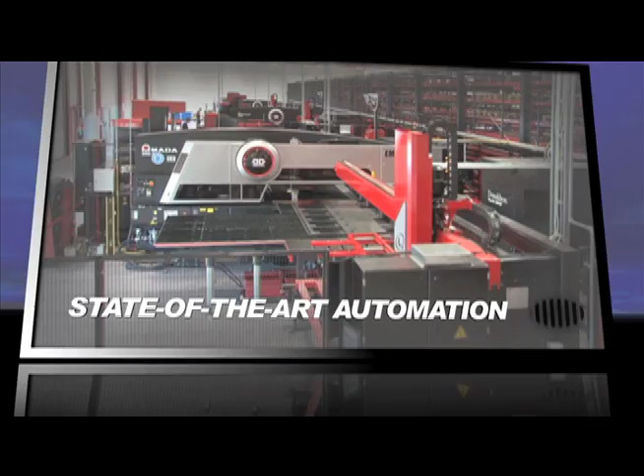Automation is a key word for us. State-of-the-art automation. Flexible. Streamline processes.

Haaland is always overcoming challenges and creating a clearer vision of the future. The challenge of automation.

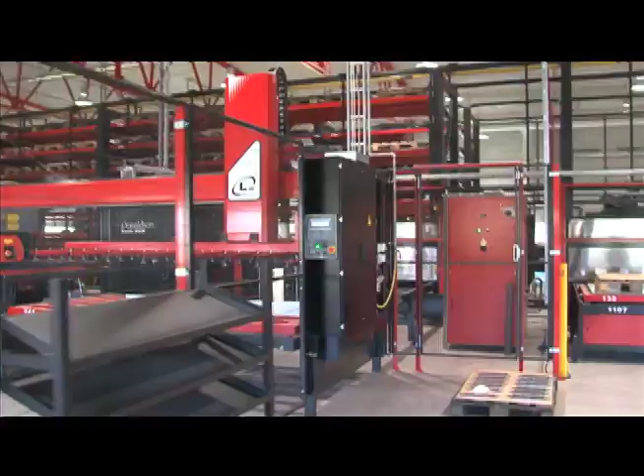Norway - this country is famous for its fjords and wild and beautiful nature. Haaland is located about 50 kilometers south of Stavanger. Over the past couple of years, Haaland has faced tremendous challenges to introduce and incorporate state-of-the-art automation systems into their facilities. The people of Haaland are proud to share their story and success.

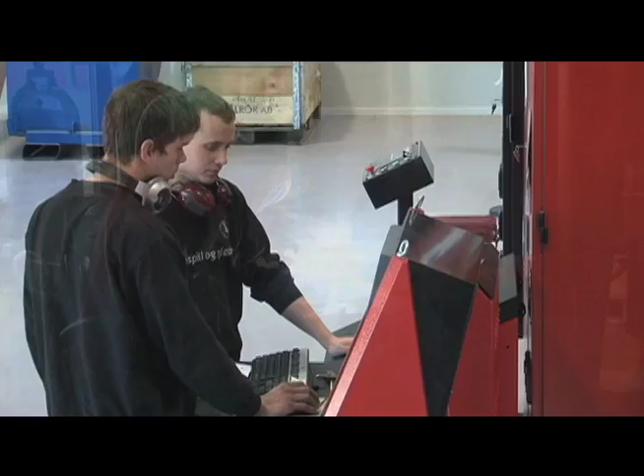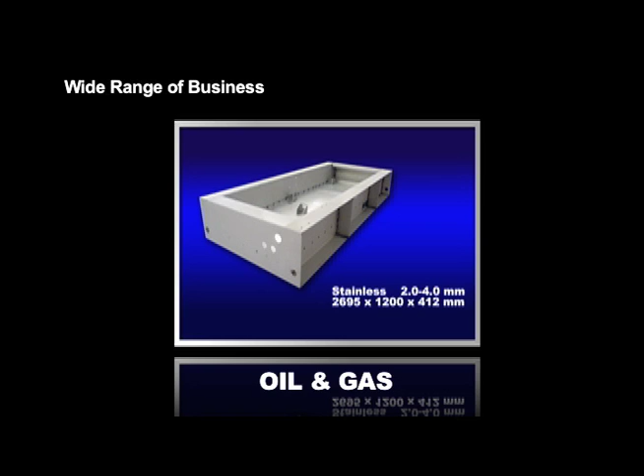My name is Ragnar Sandva. I'm the managing director of Haaland. Haaland started its sheet metal business back in 1982, and we are currently about 100 employees. We are a subcontractor company covering a wide range of businesses from oil and gas, electronics industry, agriculture, and also some for the maritime industry.

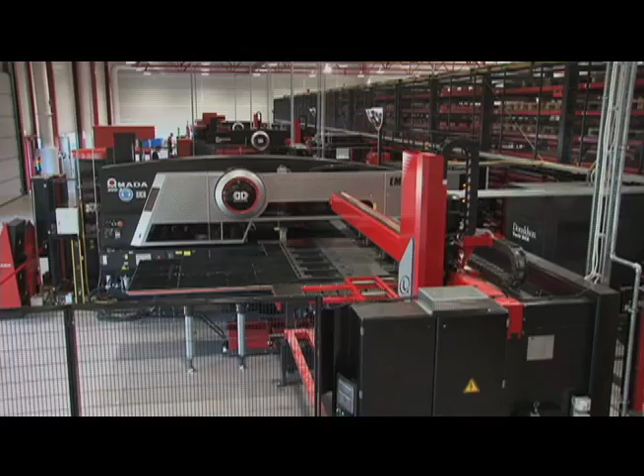Mr. Ragnar Sandva explains the reason why Haaland introduced state-of-the-art automation systems into their facilities. We did a lot of forklift driving, transporting raw material into the machines and finished goods out of the machines. We used to spend maybe many thousand hours driving forklifts all around the factory, and there was a lot of manual tool setup.

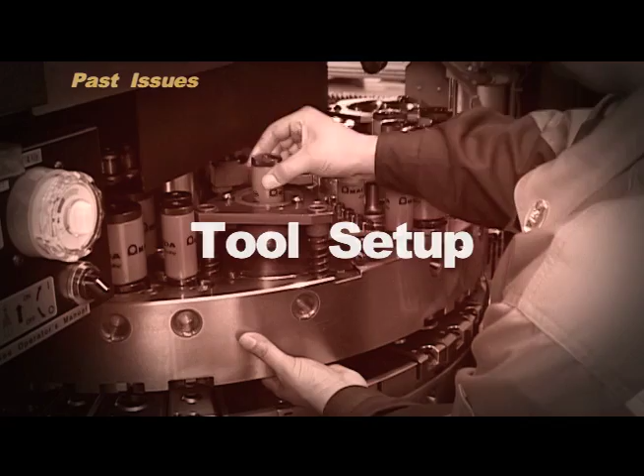When we decided to build a new factory, Amada was the company that came up with the best solutions to our questions. We saw on the entire manufacturing process, from design through programming, production and finished goods.

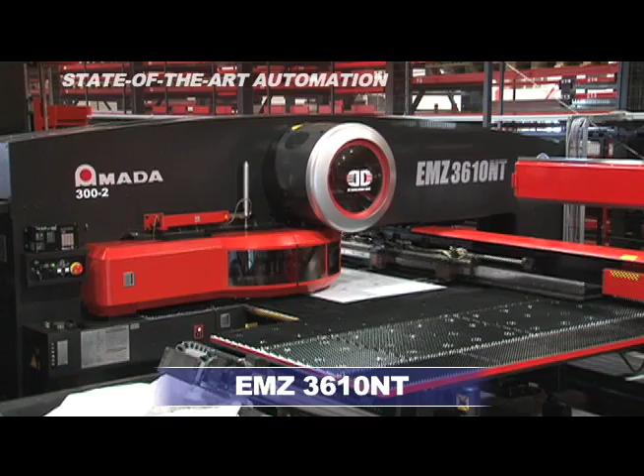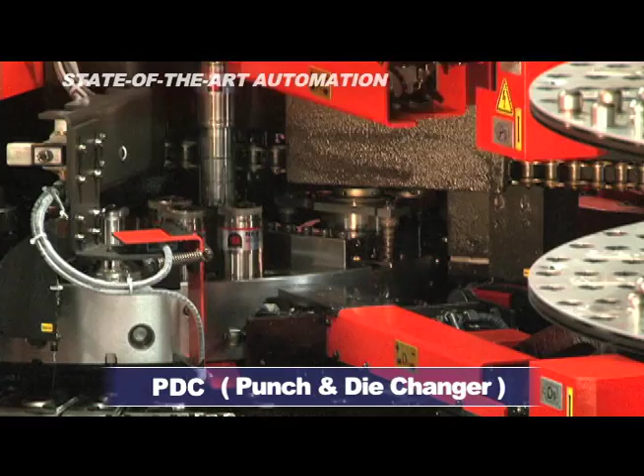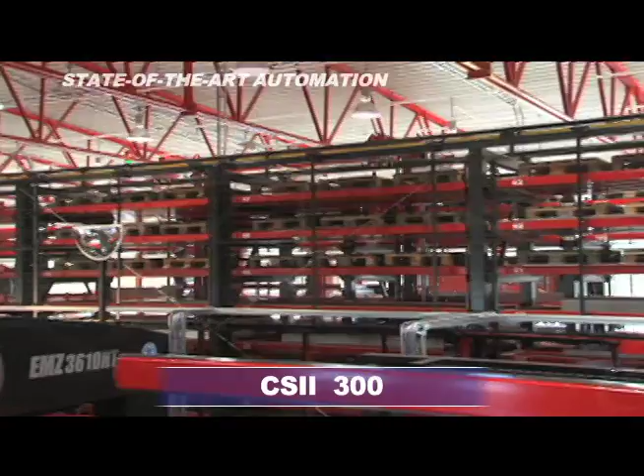Let us first take a closer look at their new automation system in the blanking process. There are 2 EMZ 3610NT punching machines and 1 EML 3610NT punching and laser combination machine combined with the PDC, or automatic punch and die changers, as well as an automatic sheet loader and parts unloader. Those 3 machines are connected for a total of 299 shelves in the CSII 300 automatic storage system.

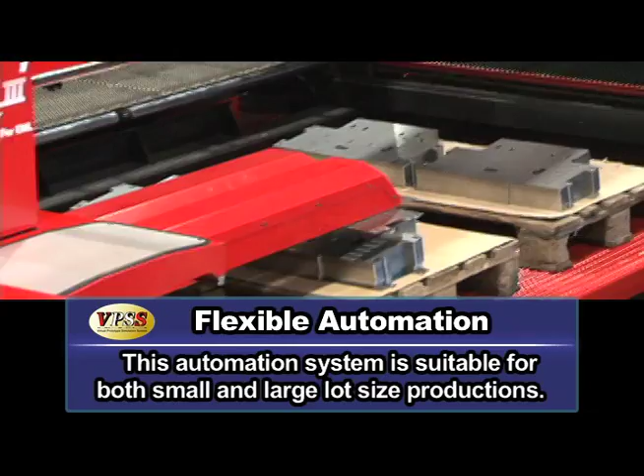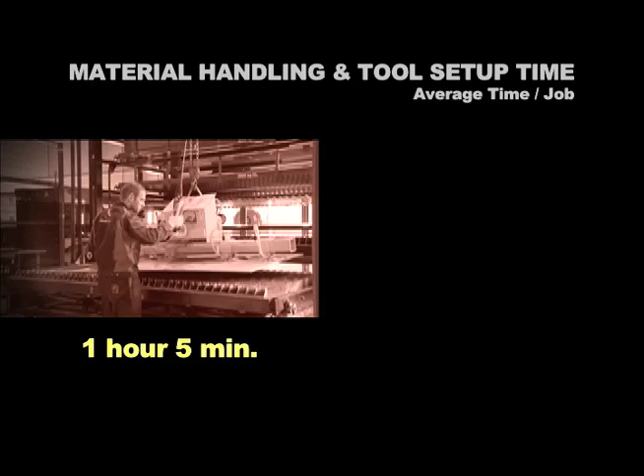Much more flexibility - doesn't matter if it's 10 or 500, the automatic system can do that for you, and you also got the tool change. That was a revolution for us. In the old way, by doing everything manually, finding raw material, doing the tool change and stuff like that, we used 1 hour and 5 minutes. Afterwards we used 4.5 minutes in the same operation. I think we save approximately 12,000 hours a year.

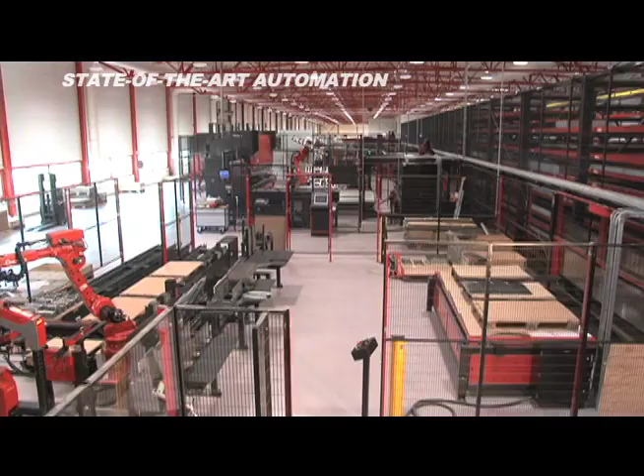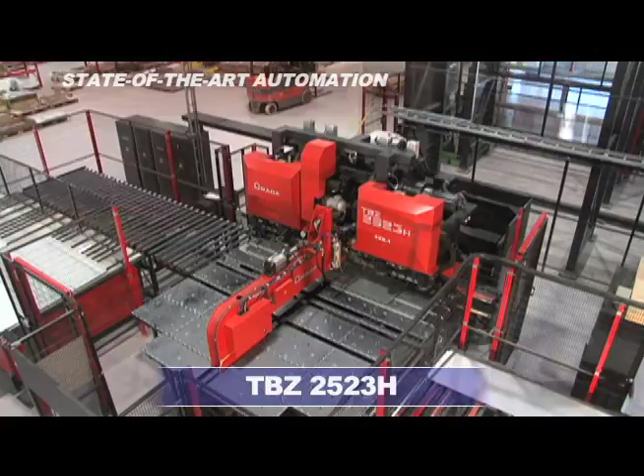Next, let's take a look at their automation system in the bending process. There are 2 different types of machines: one is the TBZ 2523H panel bender, and the other is the Astro II 100NT cell bending robot.

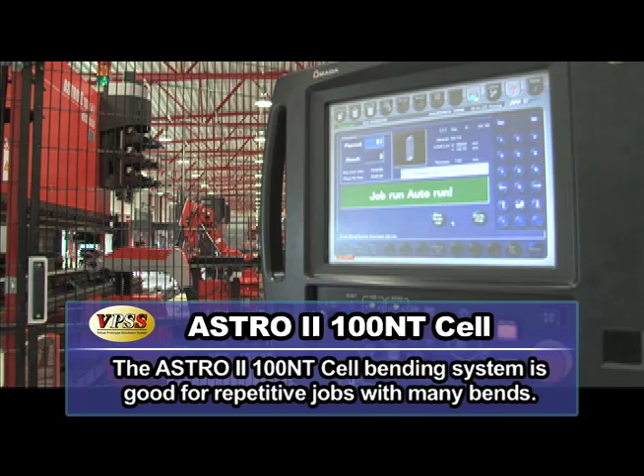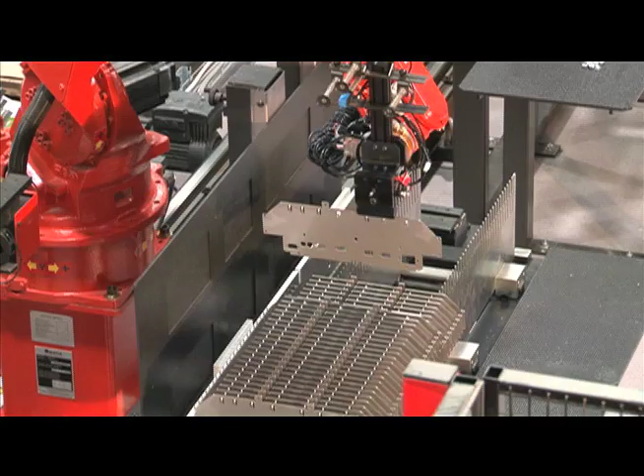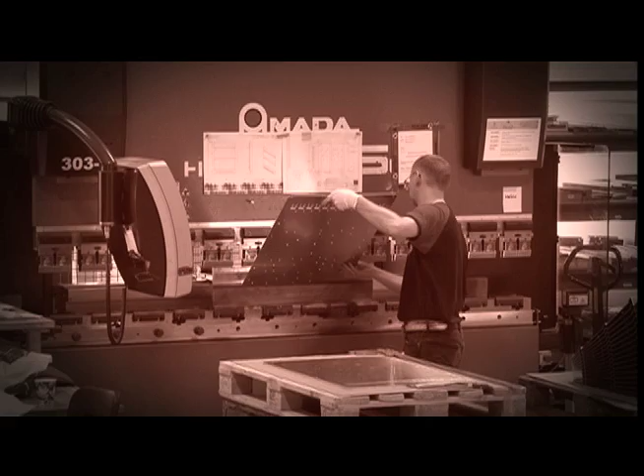For the right products, TBZ is very, very efficient. Astrocell is very good for repetitive jobs with many bends, and it's a very stable partner for big series. So it's not an operator just sitting there waiting for the jobs to be done - he's also programming the Astro, so he has to go back to the office and do the next programming for the next jobs. Compared to the old setup, we have reduced man-hours at least 50%.

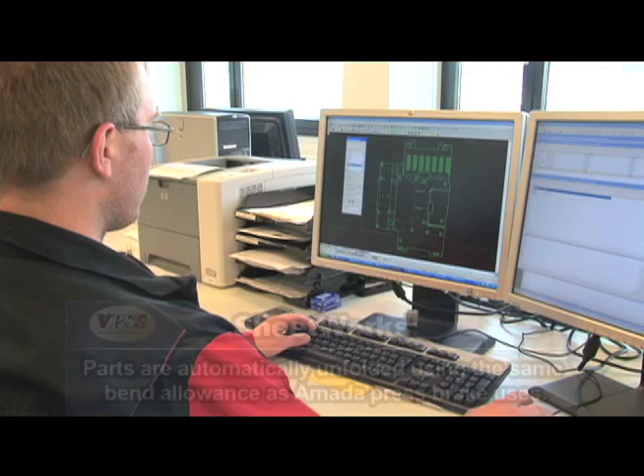During the first phase of the automation project, Haaland focused not only on machines, but also software. The SheetWorks works quite amazing because the accuracy of bending with bend deduction and stuff like that is quite different than we have been used to earlier. The software system, the way Amada does the thinking, lets you see the full picture. I like the way Amada thinks.

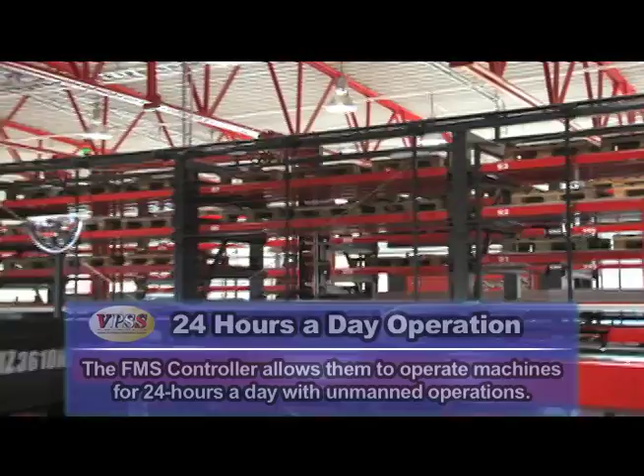With the FMS controller from Amada, you can now plan 24 hours each day. The most amazing thing is that since startup at the end of 2008, there have been no problems with tool changing with the CS system or anything - it's running perfect. vFactory - we want to use vFactory as our marketing tool for showing them live what's happening now.

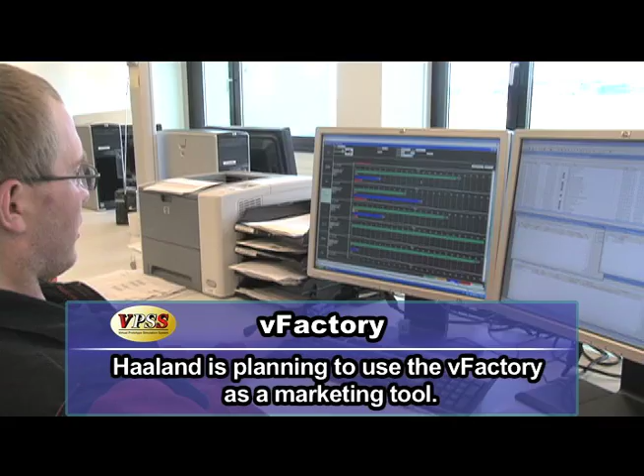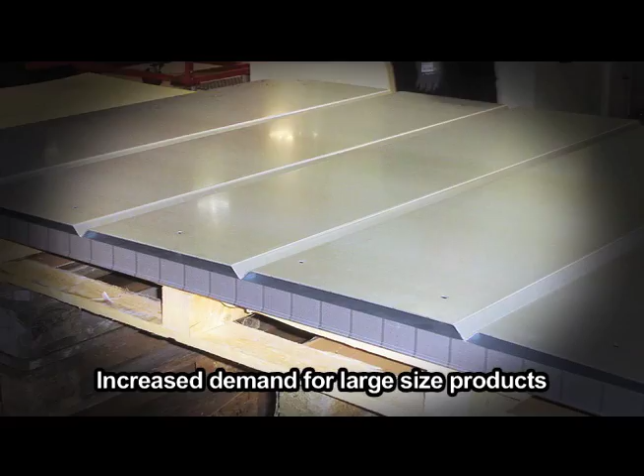As we have seen here, Haaland has achieved state-of-the-art automation in the blanking and bending processes and increased productivity, but their automation challenge continues as follows. Over the last 1.5 to 2 years, the demand changed to bigger parts, and we saw the need for a bigger Astrocell.

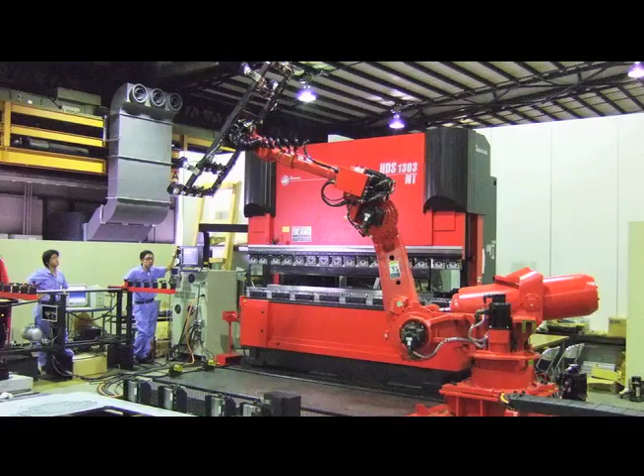After a long developmental stage incorporating various methods of testing and rigorous analysis, Amada engineers complied with Haaland's request by suggesting the HDS Astro 165W bending robot system in 2009.

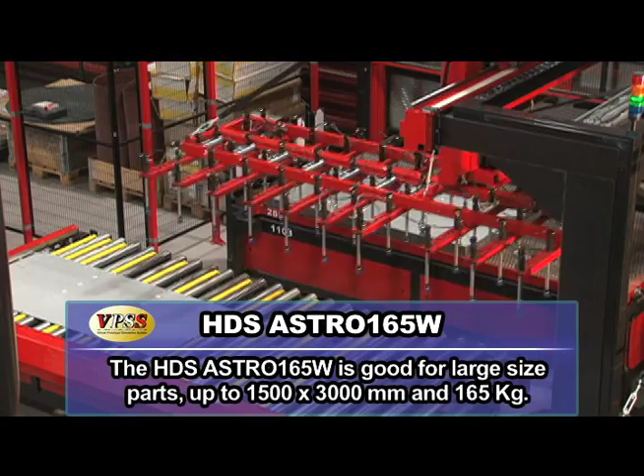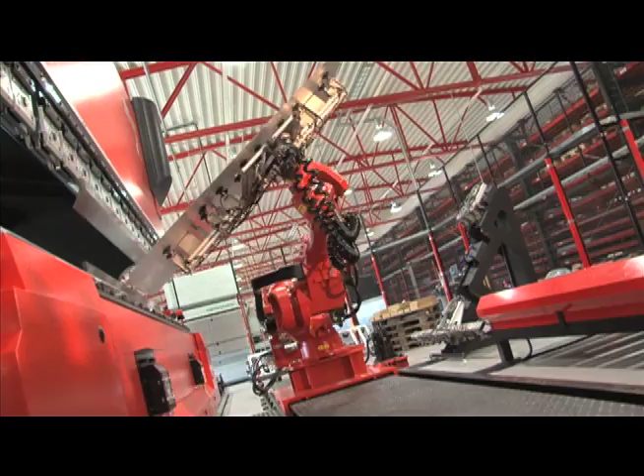That's been quite genius in our production, because many of the big parts we used to need 3 or 4 people to lift. Now we don't have that anymore - there is one robot lifting the parts as easy as anything, and that's been one of the biggest gains for us in comparison to manpower.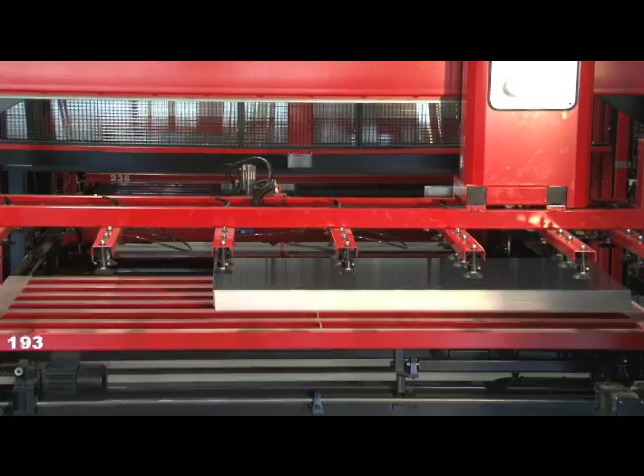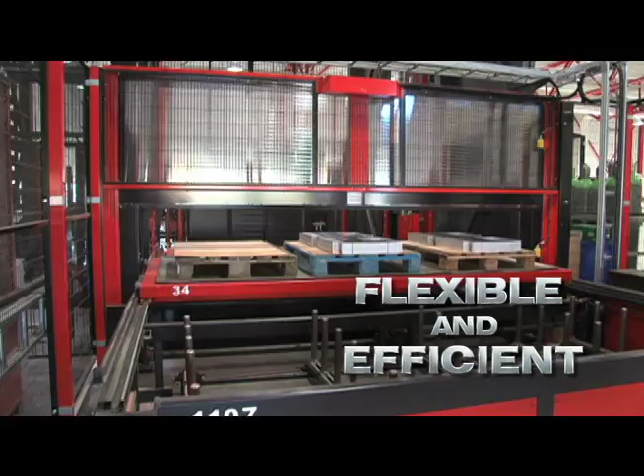By utilizing a state-of-the-art automation system, Haaland has eliminated a great deal of material handling time, as well as tool setup time, while also increasing productivity. It flexibly performs for a wide range of different sized parts, efficiently, regardless of the production lot size.

In closing, we asked Mr. Ragnar Sandvai about his future plans and relationship with Amada. When we look into the future, we see a further expansion of our business over several fields, and some of the customers that we have today are steadily growing.

Communication between Amada and Haaland as it is today, I think that's very good, and we should continue to challenge each other.